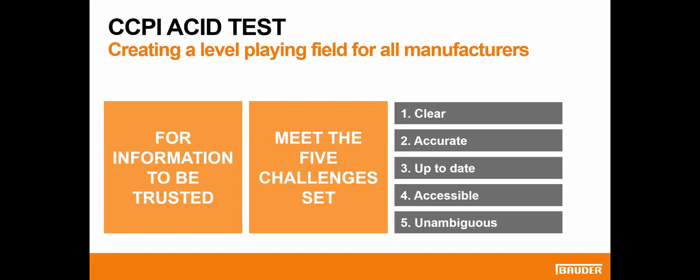In the consultation, based on a draft document of the code published in January, there was a request to all sorts of different groups, from providers to users, trade associations. People were so keen to give comments that they extended the period into Q2 as well, and the findings were published in August, quite a meaty document giving an overview of people's responses. To summarize briefly, in the most part it was very positive in support of the principles set out, but there were some levels of detail that still needed to be ironed out. So not surprisingly, people were asking, can we have some more detail on that?

As was mentioned only this morning, this press release, hot off the press, basically says this is now the actual code, made up of 11 elements and based on the acid tests. This is what we're taking forward, and it also gives some guidance for manufacturers on how they may wish to register to get involved in being assessed.

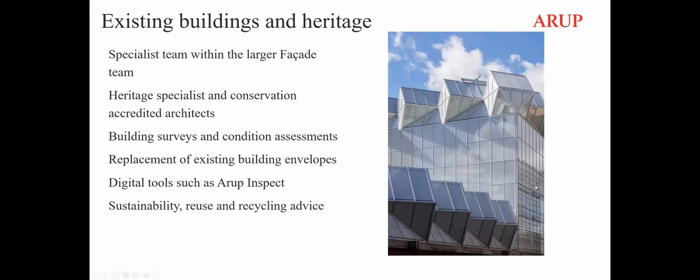So today, we're just going to talk about two of our most recent projects and looking at the quality and compliance.

We've picked the Burrell Collection, the youngest listed building in Scotland, and Lloyd's of London, the youngest listed building in England, for a nice symmetry. The Burrell Collection was originally constructed starting in 1978 and opened in 1983. As Arup, we've been involved in the complete building envelope refurbishment. It's been closed for 3 years now and will reopen in March 2022. On the right hand side, we have some images from the original construction.

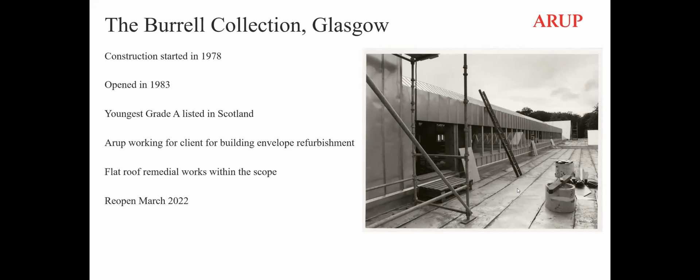One of the large elements was the flat roof within the Burrell. As we can see, it was stainless steel cladding laid on a completely flat surface, and as per the image on the left, it was prone to a lot of standing water, which in turn led to quite a lot of leaks throughout different galleries within the collection.

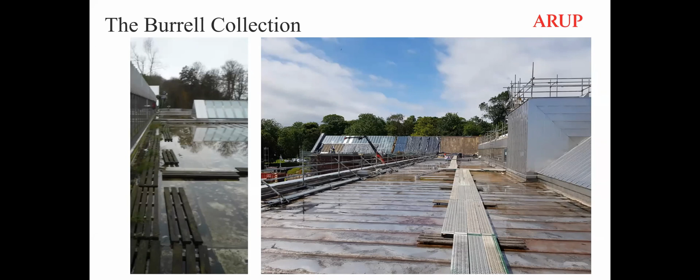Within the original design, when we stepped in to work with the client, we were looking at PIR insulation, which would be cut to falls within the existing footprint of the building. But around the time of the design development and the tender, there was a very high profile fire in the centre of Glasgow, and the client very quickly changed their requirements, wanting all combustible insulation removed from the project. This came from their requirements and from their insurers, and despite it being in line with building regulations at the time, this was an enhanced requirement.

From there, we set out to look at what products and systems could meet the requirement of enhanced fire performance while meeting the required thermal, weatherproofing, and every other performance requirement set out. We presented these options to the client, and the decision in the end was FoamGlas, which would be cut to falls, within the Bauder system. The advantage of this product was a single-point guarantee for all components within the roofing build-up.

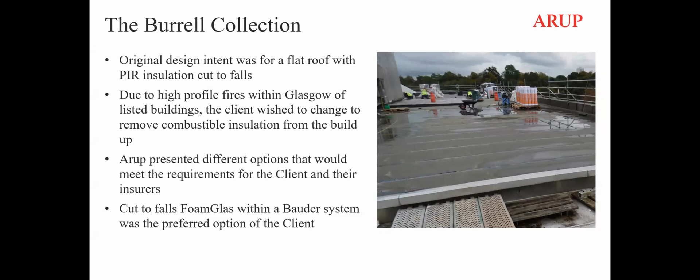With existing buildings, and it will be the same on Lloyd's, which we'll see, we are constrained in what we can do. With the upstands and key interfaces, there is only so much improvement we can make in terms of performance. But the key one on this was the flat roof, the main point of the roof, just to keep the water out, and any improvement is for the best.

And this is from a couple of weeks ago, as we're starting to near completion, the introduction of PV panels as well to the flat roof areas.

The second one is Lloyd's of London. This started construction in 1978 and opened in 1986. As mentioned before, it's the youngest listed building in England. Arup's involvement in Lloyd's goes back to the very original design - we were part of the design team working with Richard Rogers. At present, we are involved in helping to maintain the building, carrying out regular inspections and ensuring that the building is always performing the best that it can.

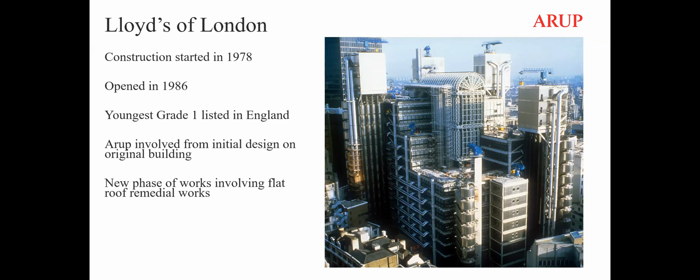We have some images here of the waffle style flooring, which is being constructed throughout the full project, and some of it at the present moment.

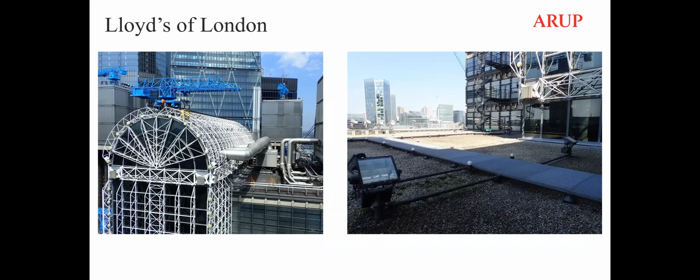Lloyd's, from the very start, when it was originally designed, was prepared to go above and beyond what the regulations were at the time. The original roof actually has foam glass within it, and this is just over time - this is the original roof that was put down. It was felt that as part of the refurbishment works on other elements of the building, we should look at the roof as well.

We carried out inspections for the client, undertook some testing, and presented options for how we could completely replace each roof on the building, looking at how we could keep the heritage listing, which has a lot of key requirements. Every element within the roof build-up is part of the listing, down to the paving slabs, the granite stone on some of the roofs, and the reflective roof surface on each of the towers.

When we met the client, the requirement was that we kept the same build-up to achieve the same minimum performance.

And from there, we presented the options, again foam glass being a key requirement in this. We engaged with Bauder on the client's behalf, that the preference was that we would look at a cut to falls foam glass insulation with a new Bauder bitumen membrane roof.

And from there, Bauder came to site with us. We carried out site inspections to check the current condition of each individual roof, to record the as-built condition as well. And from there, we've been involved in the tender, appointing the contractor, reviewing the design, and at the present moment we are on site carrying out site inspections.

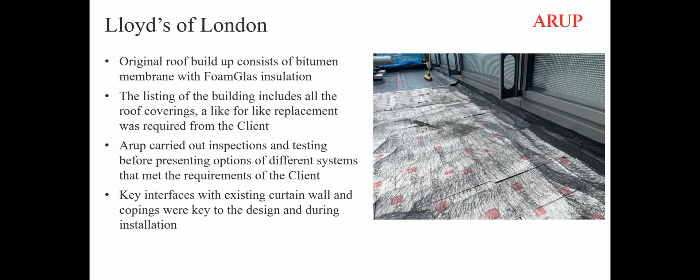We've looked at this from the design, and it was one of the key aspects we had to look at from the very start, was the requirement for that quality being met by the contractor, and on site we're ensuring that it is being installed to that point. And we just have some of the images here of the current installation underway.

And that is it from myself. I'll pass back to the panel.

Thank you very much. Thank you, Alan. Really interesting to see some of the changes and improvements that have been made on both of those projects there. Okay, Alan, if you, thank you. You've just stopped showing your screen, so I'm just going to go back into my screen.